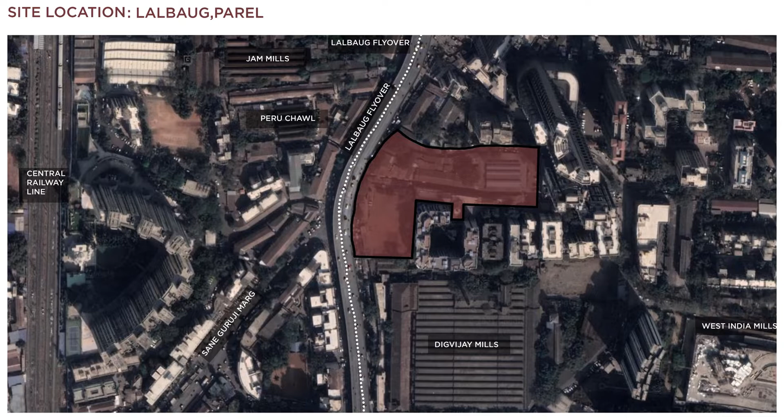Girangaon is spread over nearly 600 acres of land, with almost 60% of land having undergone redevelopment. The site selected for intervention in Girangaon is the Lalbaug precinct in Parel. It is situated along the Lalbaug flyover and beside the Digvijay Mills compound. The redeveloped buildings in the context of the selected site are visible indicators of the trauma of urban violence. They create an economic divide within the community through a stark contrast in the design of the saleable and tenement components and pay absolutely no attention to the cultural aspect of Lalbagh.

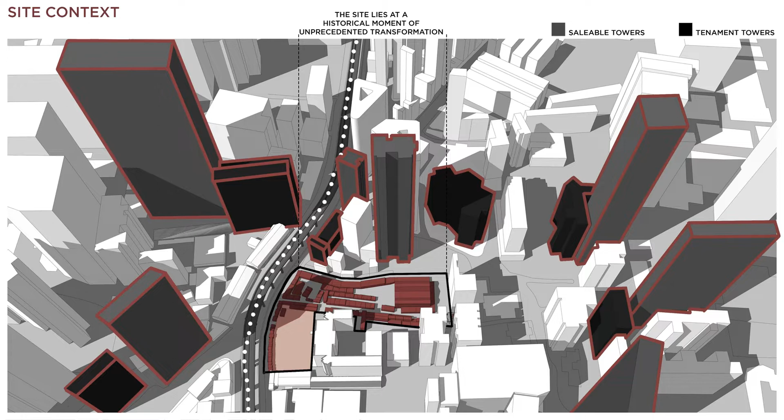Within this densely packed neighborhood, the selected site in Lalbagh is one of the very few pieces of land which lies at a moment of unprecedented historical transformation. The total site area chosen is 10,000 square meters and consists of two important components which contribute to the culture of the place: its market and its stalls. Analysis of the site has been done where all existing markets and housing on site have been marked and documented. In total, there are 239 vendors and 30 inhabited flats on site.

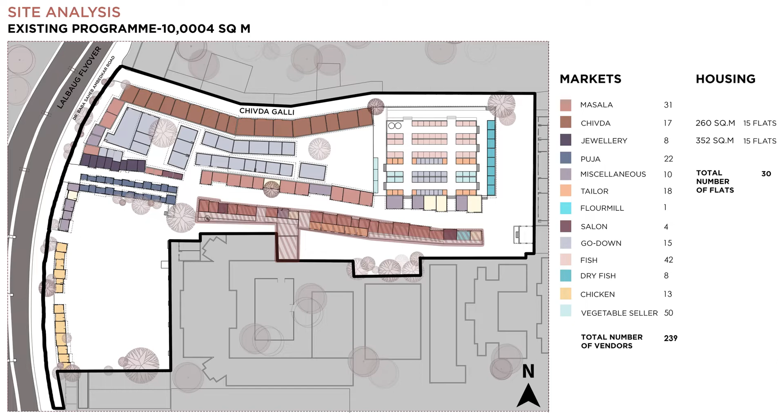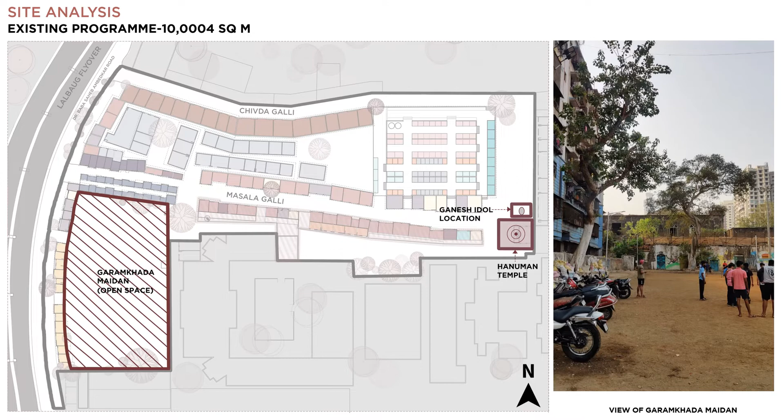What can be seen is that the site has grown organically, leading to a formation of Chivda Galli and Masala Galli. One of the most important landmarks on site is the Hanuman temple towards the east and the Ganesh idol location beside it. The only open spaces on site are the Garamkhada Maidan towards the west and the space beside the temple. During the analysis, I observed that with the setup of temporary infrastructure in different parts of the site, Lalbagh transforms itself immensely during the festival of Ganesh Chaturthi.

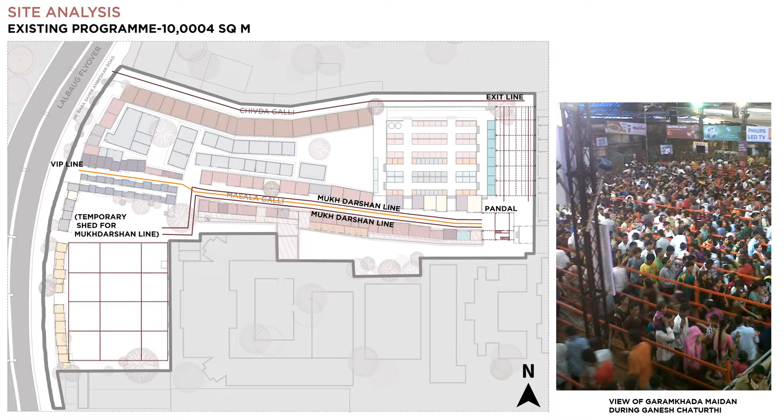In order to understand the quality of temporality as portrayed by Lalbagh, the site needed to be understood and studied in two different time periods. One, by mapping the everyday, and two, by mapping the festivities. Mapping the everyday of Lalbagh was done by analyzing the functioning of its dukans and makans. Lalbagh is very famous for its markets throughout the year.

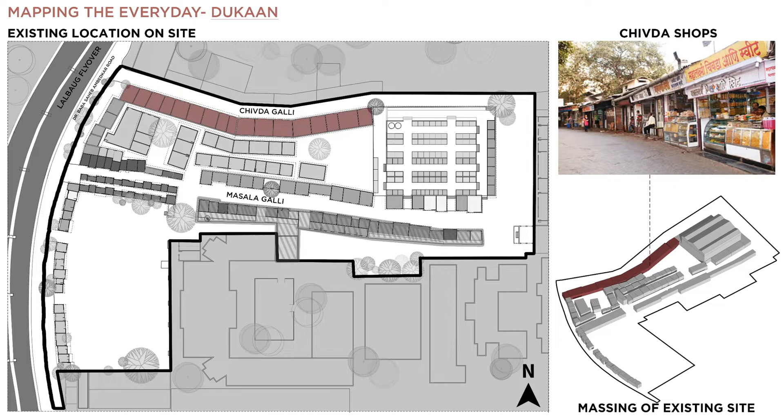A walk through the lanes of Lalbagh is filled with a variety of different smells. The shops that contribute majorly to this experience are the Chivda shops along the Chivda Galli, the Masala shops along the Masala Galli, the tightly packed puja shops situated towards the main road, and the flower vendors in front of the Hanuman temple. Apart from these major markets, what could be seen is a high number of jewelry shops on site, giving an insight into the domestic needs that this place fulfills.

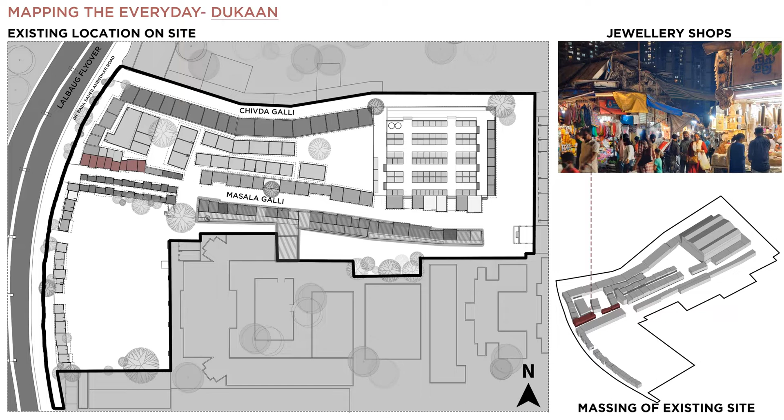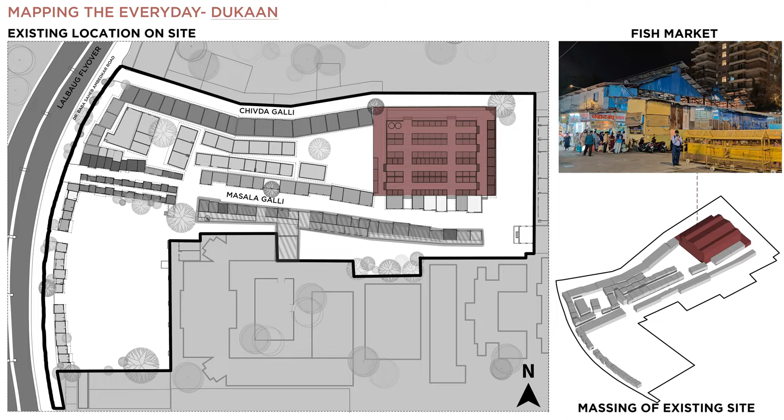The fish market on the site towards the north is of immense significance, as its construction is the sole purpose for the establishment of the famous Lalbaugcha Raja. Apart from these markets within the site, the Kombdi Galli with its chicken shop and the vegetable vendors along the fringes bring in a lot of footfall along the main roadside.

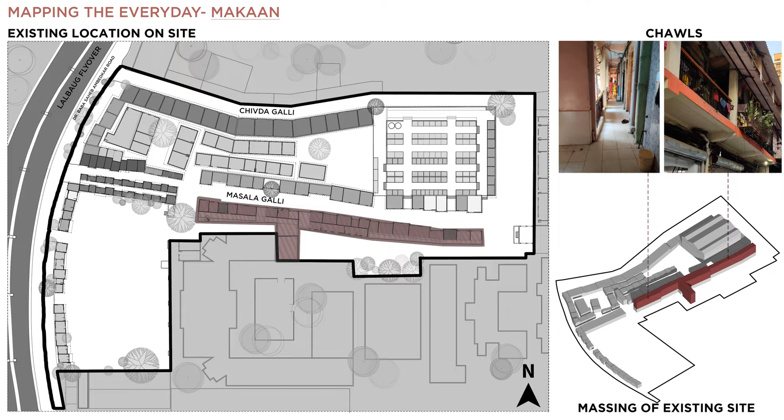After numerous site visits, what could be understood was that the true culture of these markets lies in these gullies of Lalbagh, which are incomplete without its chaos. Mapping the everyday of Lalbaug's makaans, there is only one chawl situated on site, which houses a total of 30 flats. This building runs parallel along the gullies and is a G+2 structure. The chawl culture of Lalbagh is vested within the narrow passages of this chawl, which plays a crucial role in the community interaction.

Mapping the festivities of Lalbagh: Lalbagh, the home to Mumbai's most awaited festival of Ganesh Chaturthi, undergoes immense transformation during this period. This festival of 11 days transforms the site into an urban living room. This festival can be seen to take place in three parts, namely impermanence, euphoria, and reversibility. For creating the ambience for the 11 days of the festival, all the dukaans are shut 21 days prior to its start for installation of temporary infrastructure, which brings in the quality of impermanence on the site. Even the fish market on the site changes its functions and is used as a place to store Ganesh idols.

During the festival, the site is a place of complete euphoria with absolutely no pause button to its functioning. It is only after the final Visarjan day that the shops return back to their original state and give the site a sense of reversibility, however, with the chaos still remaining intact.

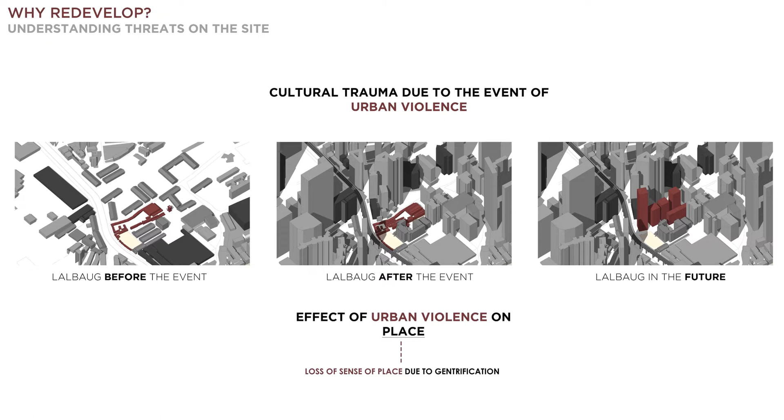This area of Lalbagh has been running in the same manner for the past 85 years, with its neighbors getting redeveloped at an immense pace, undergoing the trauma of gentrification. And owing to the age-old crumbling infrastructure of its stalls and markets, Lalbagh lies next in the line of redevelopment. If Lalbagh undergoes redevelopment like its neighbors, it would undergo a complete cultural trauma, taking away its place identity in the future and making it merge with the surrounding fabric.

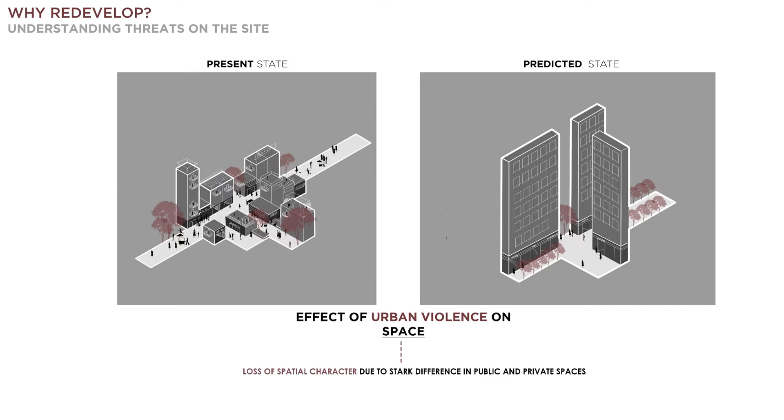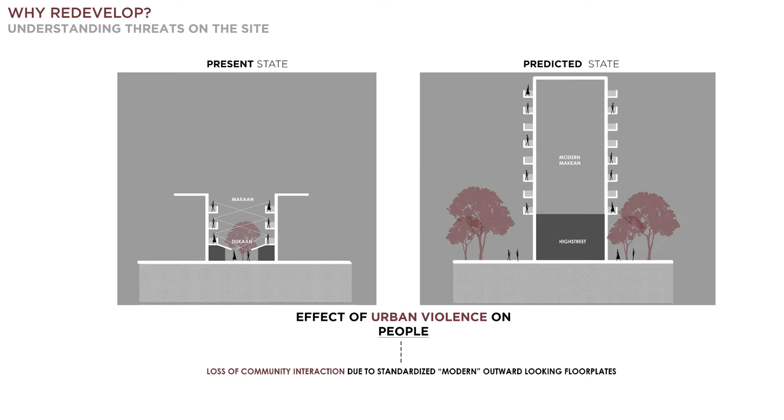This trauma of urban violence, which is a common trend of redevelopment, takes into absolutely no consideration the cultural aspects on site. It would lead to a loss of spatial character by monotonous construction and would alienate the place with the standardized and so-called modern design templates, taking away the true essence and character of Lalbagh, thus traumatizing it. So will Lalbagh become a victim of this disruptive urban transformation, or can it find a different way to survive and thrive? This makes it necessary to think of viable solutions to design problems without compromising on the necessary and relevant changes required by the place.

Hence, the design program that I suggest would entail community participation and would work on the lines of self-redevelopment. The Self-Redevelopment Act, according to MHADA, has shown immense success rates and has allowed people to choose their own architects and design strategies. The project would be funded by the Lalbaug Raja Trust and would consume a total FSI of 4. Can a culturally competent architectural solution act as an antidote to this trauma?

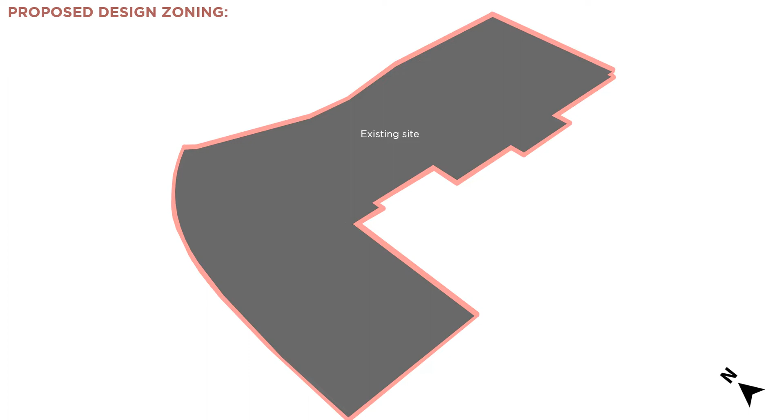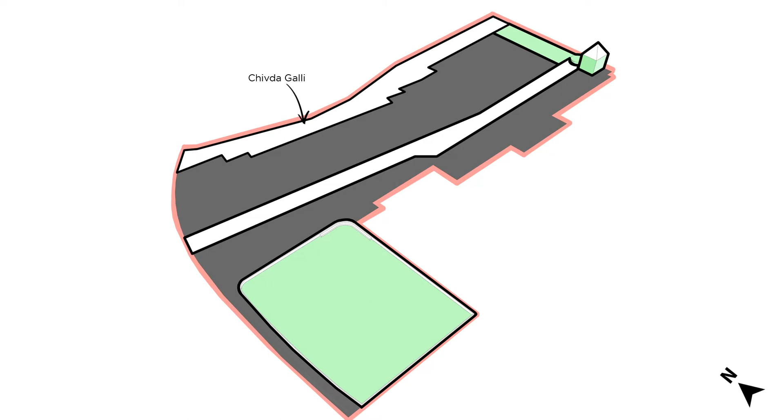The concept for my design program started with the translation of the method of self-redevelopment into my zoning. It started by locating and marking the most important nodes on site. Being aware of the significance of the two gullies, the Masala Galli and the Chivda Galli were retained. A 0.4-meter wide platform was inserted along the entire gully, taking into consideration the infrastructure that needs to be set up during the festival. In order to ease traffic congestion, a drop-off point along the main road and 2.5-meter wide pathways were added in places of maximum footfall.

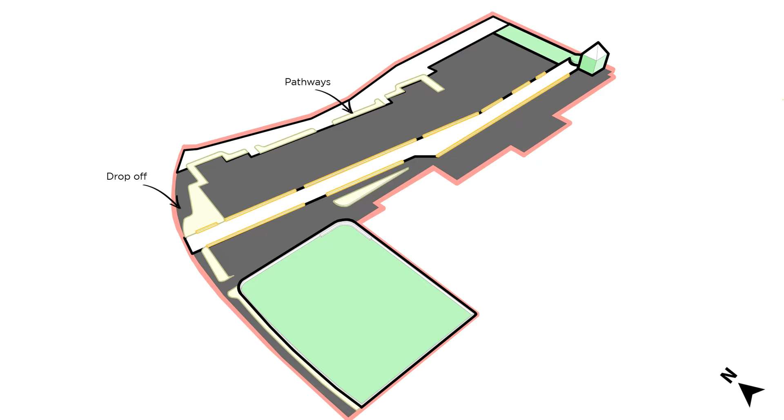Taking into consideration the close proximity of the site to 4 railway stations, and having observed that two-wheelers are the most preferred mode of transport in the area, parking areas have been provided along the road to make it easy for people to pick up goods and ride off. In order to make the main Masala Gully pedestrianized and to provide ease of servicing, a service road was introduced along the Maidan.

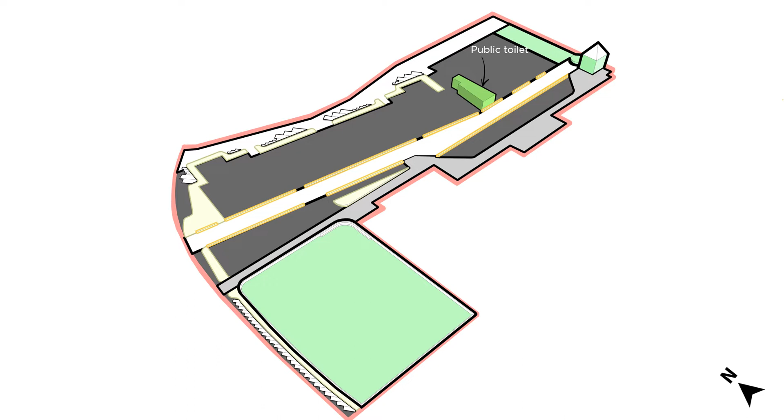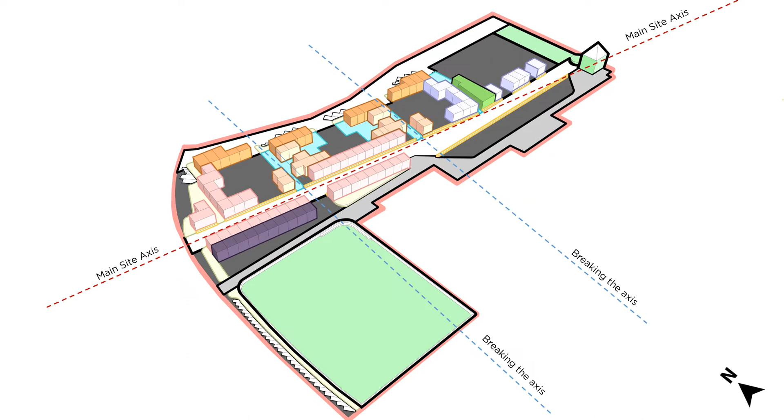Considering the lack of public infrastructure on site, a public restroom was placed in the center for easy accessibility to all. All the 30 masala shops were placed along the Masala Galli and 17 chivda shops along the Chivda Galli. The 16 tailor shops, 15 jewelry shops, and the rest of the miscellaneous shops were placed in a way that internal gullies were formed. These gullies helped break the monotony of the straight gullies while allowing the site to breathe.

Next, the puja shops were shifted towards the mandir along with the flower vending area. Understanding that buying vegetables is a domestic activity that requires minimal intervention but is done while buying other goods, raised platforms are introduced along the jewelry and puja shops, which helped serve 50 vegetable vendors. This led to the formation of one more intermediate gully between them.

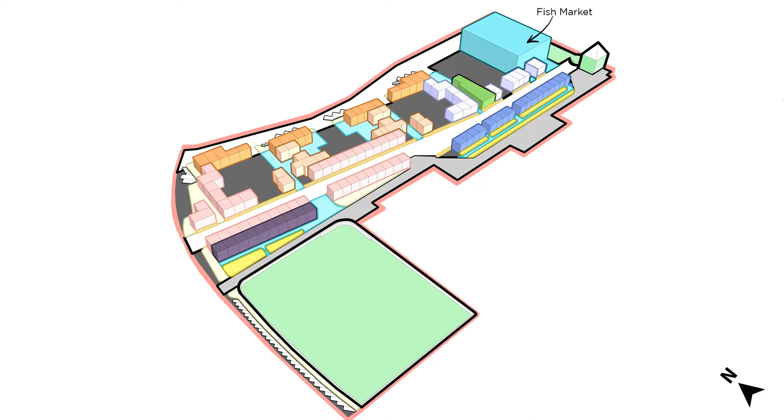The fish market, being highly significant, was kept the same, and the godowns were replaced by the chicken shops, which were earlier along the fringes of the site. This ensured a complete poultry and meat zone on one corner of the site. The godowns were shifted on top of the jewelry markets with a chili drying area, and a freight lift for carrying goods was inserted at the corner.

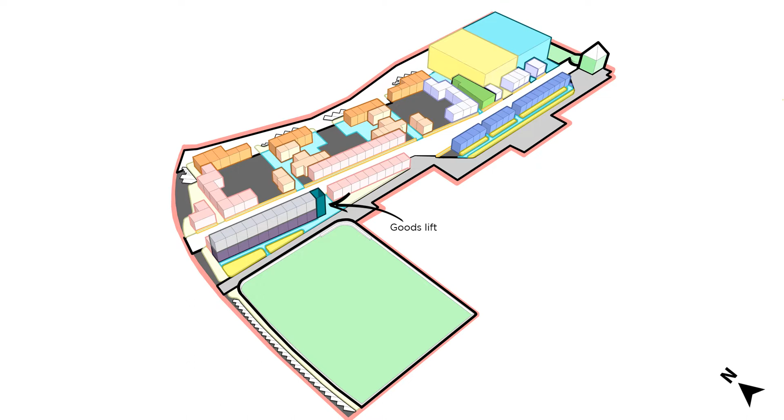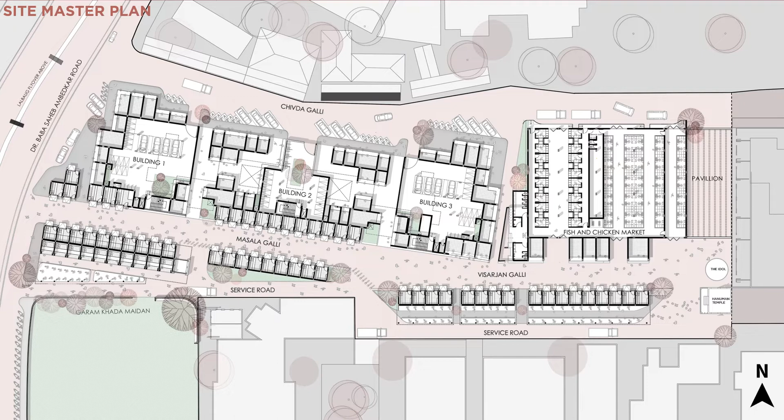The residential zone was shifted to the larger plot and was separated into 3 buildings. Taking into consideration the festivals on site, a changeable pavilion has been designed in the open space in front of the mandir. The following is the master plan of my entire site. For easier understanding of its functioning, the site can be divided into Zones 1 to 6.

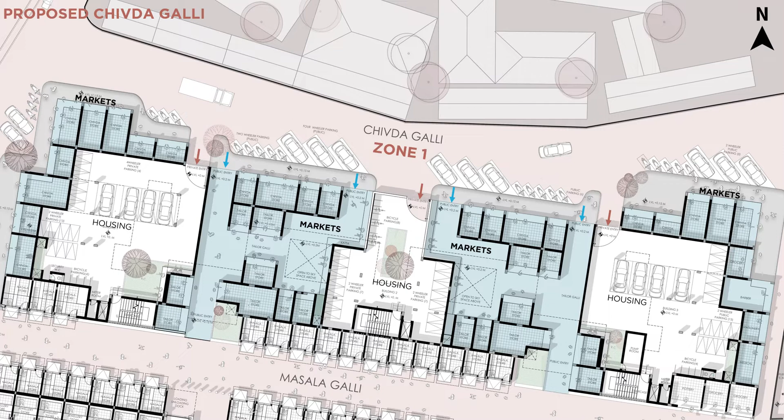Zone 1 consists of chivda shops and tailor shops. Having observed the existing chivda and tailor shops on site, the following plan was proposed. Keeping in mind the overlap of the residential and public activities along the Chivda Gully, separate public entries and private entries have been created so as to ease the circulation for its visitors and maintain the privacy of its residents.

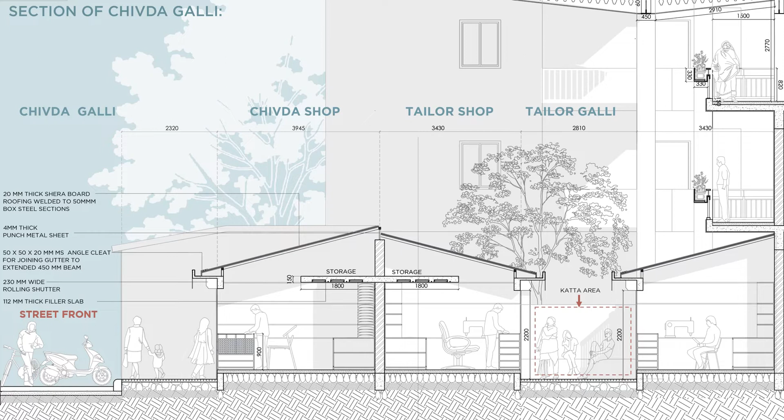The chivda shop modules have been designed taking into consideration the requirement of street front, where the street-facing facades of the shops accentuate the feeling of a gully. The katta areas act as pause points and allow the buyers on site to orient themselves while shopping. Having observed the importance of customized signages in small Indian shops, a detail has been created which allows the seller to customize his shop front while ensuring safety of his shop.

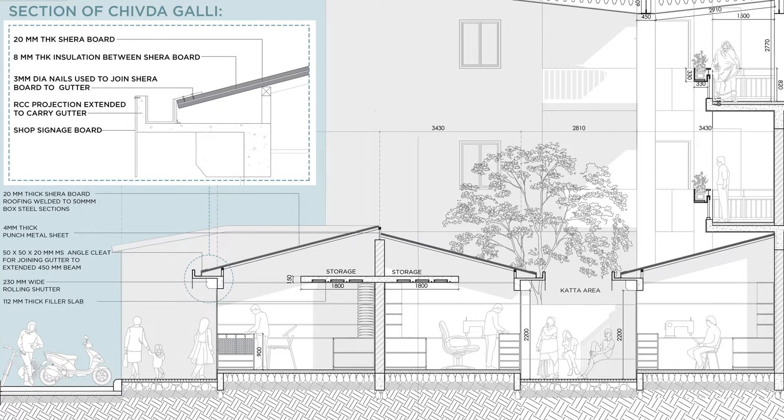The Chivda Galli has always been about its people, the bargaining and the pocket-friendly rates. However, the activity of bargaining is possible the most in places of low maintenance. Hence, simple materials like the usage of Shera board for roofing make it easy to maintain and also cost-effective for its shopkeepers. The parking along the street creates a threshold between the vehicular road and its parallel pedestrian gully.

This pedestrian gully, without any vehicular congestion, resonates with the locals and allows them to shop in the informal pattern that they always have, without compromising on the rules and orders required to make the market function efficiently. Upscaling the place in this manner will help retain the essence of Chivda Galli that it has had for the past 50 years.

Now moving forward to the second zone, which consists of the masala and jewelry shops and the vegetable vendor platforms. Similar to the chivda shops, the masala shops and their existing issues were noted and understood. In the proposed plan of the masala gully, all the masala shops have been brought together to face the gully, and the jewelry shops that were previously scattered are clubbed together.

On the other side of the gully, a platform has been introduced to accommodate 25 vegetable sellers which currently encroach the footpath. On the other side of the vegetable platform, a service bay has been introduced for loading and unloading goods which can be taken up to the godowns on the first floor by the freight lift on site.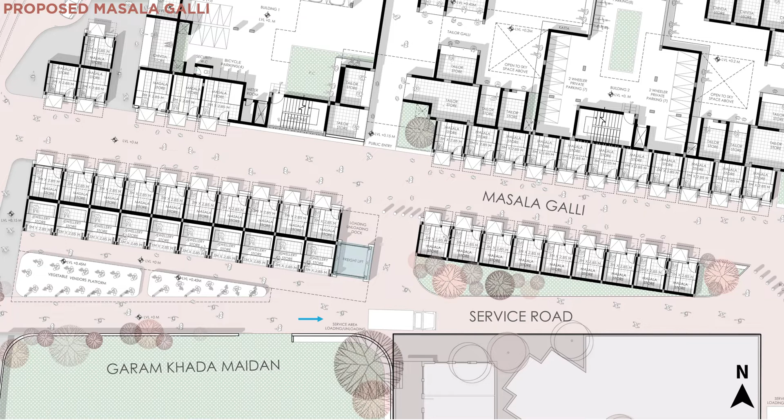The first floor of these shops along the godowns have a chili drying area. This area was shifted onto the top because a common observation on site was that most of the streets got encroached due to chilies being dried on the road itself. The space for this activity is oriented in such a way that it faces the south, thus ensuring the chilies dry more effectively.

The godowns on the other side would be used to store different types of items. However, these items may get spoiled or get discolored due to extreme hot conditions. Hence, the godowns are oriented towards the north where they could receive diffuse north light, thus preventing any hampering of the goods stored.

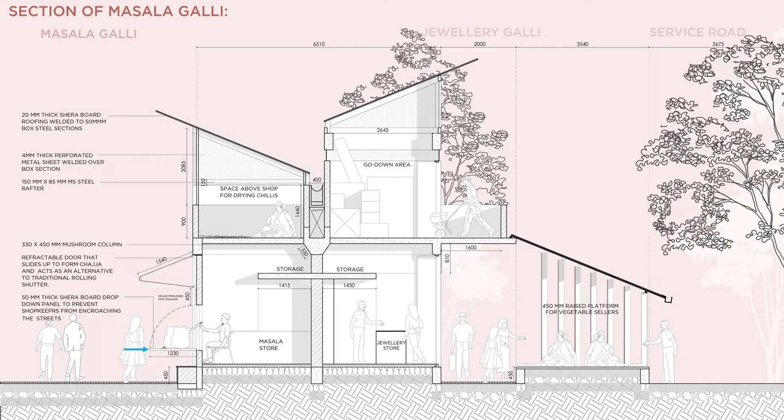Keeping in mind the encroachment done by the market sellers onto the roads, a drop-down panel detail which opens from outside has been developed, where the vendors can keep stacks of masalas which attract customers, thus contributing to the retail profits. Zone 3 consists of the puja and vegetable vendors, the flower vending zone.

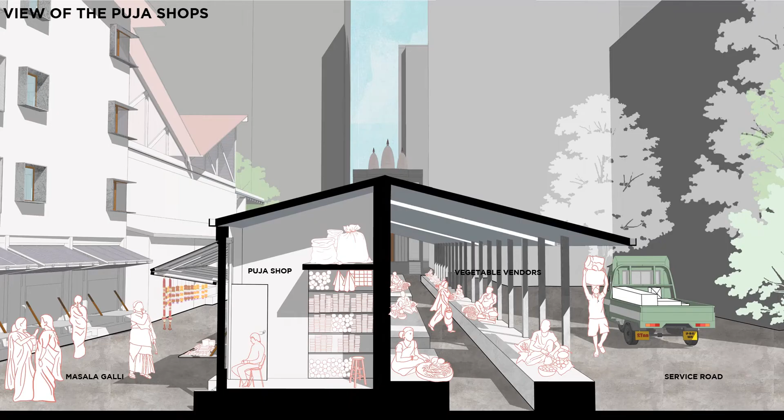Hanging goods along shop fronts, convenient for human reach, is a classic characteristic of Indian shops. This traditional method of hanging goods has been retained and made easier by the holes in the punched metal sheet of the shop roofs, thus allowing the puja galli to gain its vibrancy while avoiding any sort of encroachment on site.

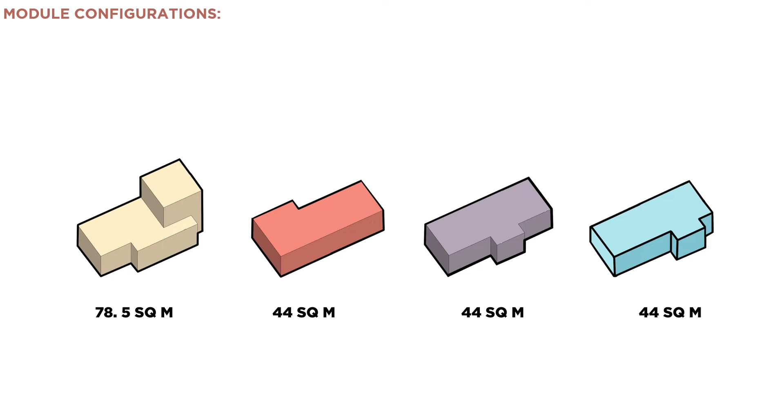Moving on to Zone 4, which is the residential zone. The once culturally strong chawls of Lalbaug have now become deteriorated and do not cater to the changing spatial needs of its inhabitants. Hence, the proposed design program, with the help of self-redevelopment, gives the inhabitants 60% additional areas, giving rise to 4 different modules.

These modules work in configuration to form 30 modules in total and are split up into 3 separate buildings placed on site in between the Chivda and the Masala Galli. All 3 entrances are located along the Chivda Galli, and a lift and staircase block in the Masala Galli is provided for each building.

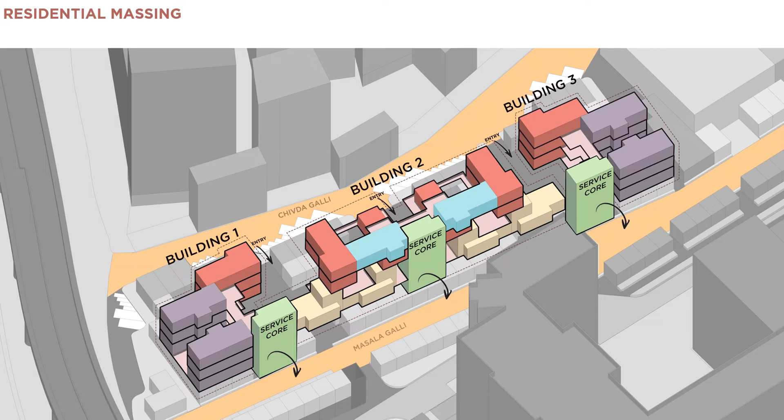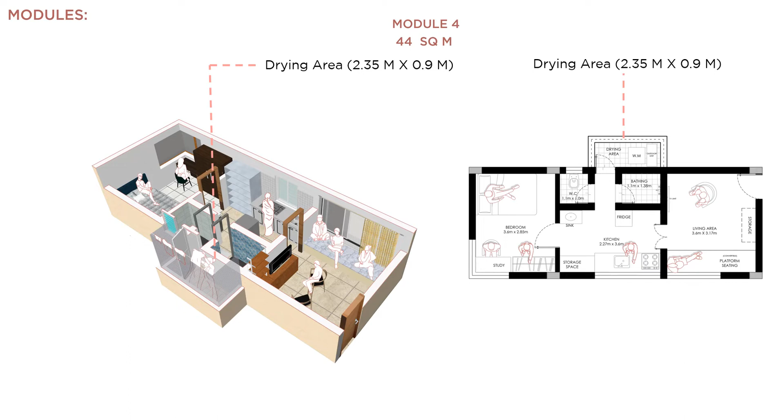Unit 1 is a duplex of 78.5 square meters with 2 bedrooms, while Units 2, 3, and 4 are configurations of one another. One common thing between these modules was the drying area that was provided in the utility space along with the outdoor units and the washing machine. In all modules, the bathroom and the toilets have been kept separate so that more domestic activities can take place within the household.

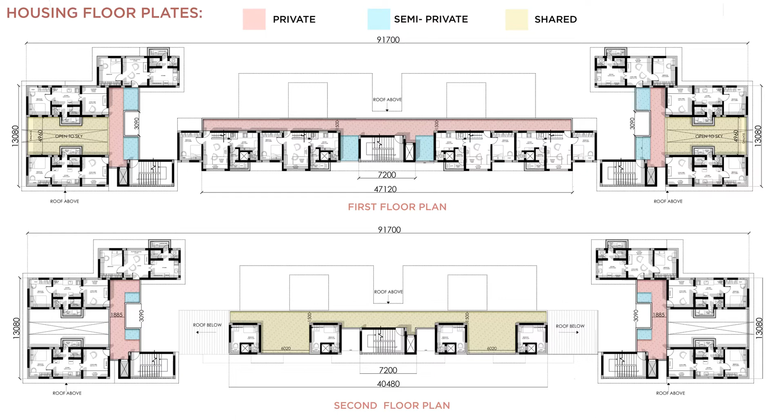These units are placed along the corridors in a manner that they share semi-private and private spaces at every level. All the three buildings have a community space which can be used for different congregational activities. Sloping roofs have been provided on top to prevent any possible means of encroachment.

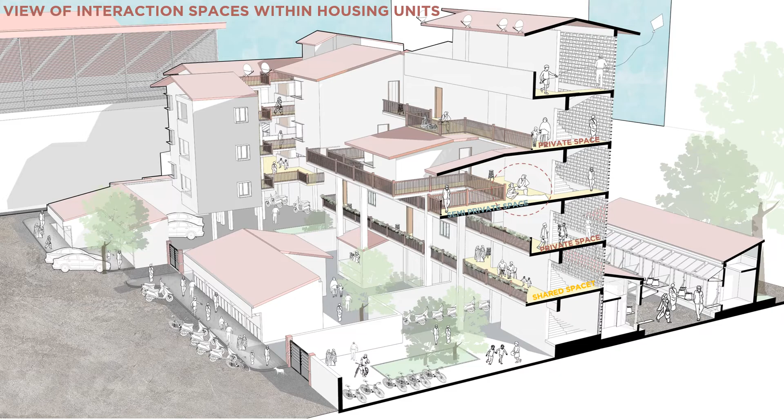A very dense urban context usually creates a sense of intimidation for the dwellers living in low-rise zones. Hence, all the corridors of the three buildings face each other, ensuring maximum interaction between its residents. The semi-private spaces serve as congregation areas for the practice of local activities like pickle making and papad drying.

The staircase on site is oriented towards the Masala Galli so that it adds to the experience of the transition zone and also acts as a platform for its residents to view the festivals during Ganesh Chaturthi. The residential zone has been oriented in a manner so that there is a visual connect between the Makaan and the Dukaan on site.

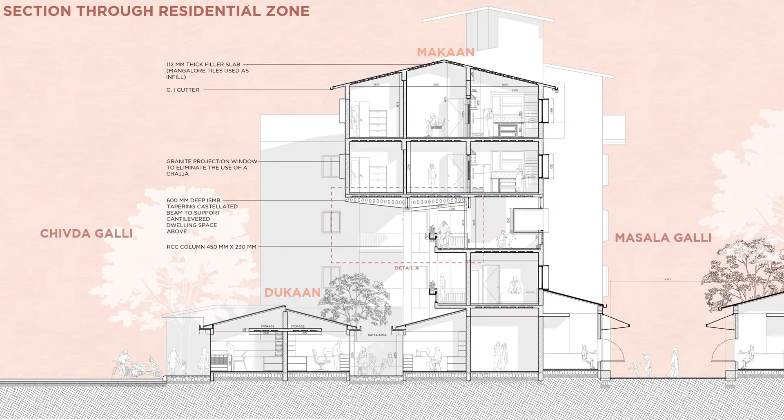Small interventions have been provided at different levels of the house. One of them being the usage of a small metal projection along the railing to keep the Tulsi Vrindavan. This helps maintain the cultural authenticity of the site. The metal grill of the projection has a small gutter-like drain which carries and disposes of the excess water rather than letting it spill over onto the building surface, a common issue seen in most residential buildings.

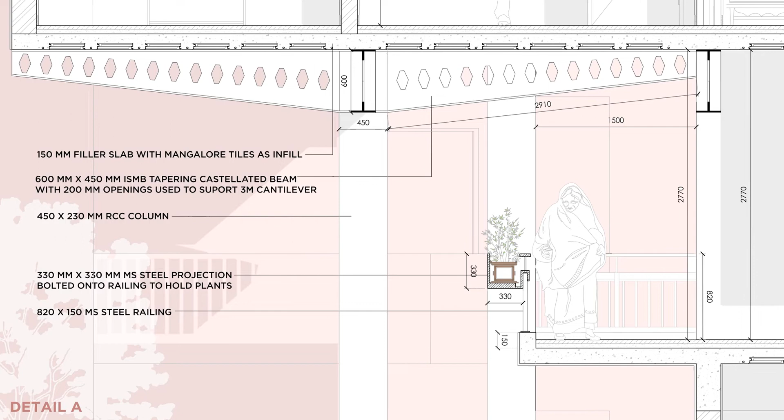150 mm filler slabs with Mangalore tile infill have been used to cut down on the cost of construction. Instead of simple RCC beams, tapering castellated beams have been used to provide support to the cantilevered portion of the housing. They provide both functional and aesthetic value to the housing project. The sloping filler slab on top adds to the charm of Parel without compromising on the feeling of a pakka house as desired by its dwellers.

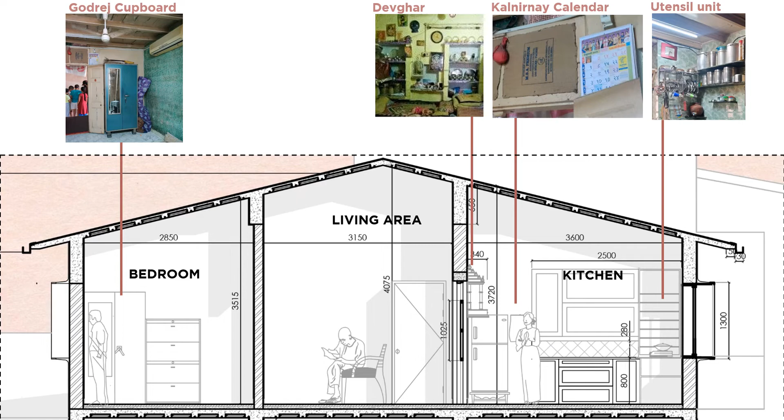Having noted the furniture that is commonly found in these households, the spaces have been created to accommodate the same, giving its inhabitants a sense of comfort. Small windows and poor light and ventilation have been a common issue for most tall housing projects. Keeping this in mind, wider windows of 1.3 by 1.7 have been provided.

To eliminate the usage of chhajjas, a detail has been developed where the granite fitting around the windows is extended ahead by 0.5 meters, thus providing protection from rains and also adding to the aesthetic value of the building.

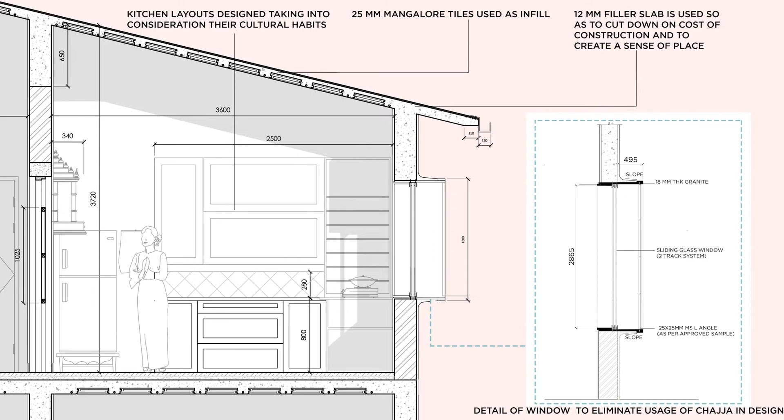Zone 5 consists of the chicken and the fish markets. Even though the current existing fish market faces tremendous footfall throughout the day, poor garbage disposal and ill-maintained services make it difficult to maneuver around the site.

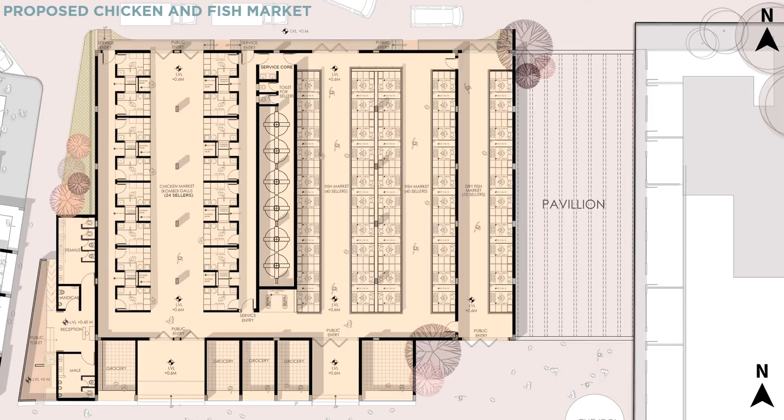The introduction of chicken shops in the fish market makes it necessary to ensure proper servicing for both activities. For this purpose, a service core has been introduced in the center for both the markets. Both the markets are connected to a service bay on the backside where the service vehicles can be parked. A knife cutter katta is provided in the center where it's a shared activity between the chicken and the fish vendors.

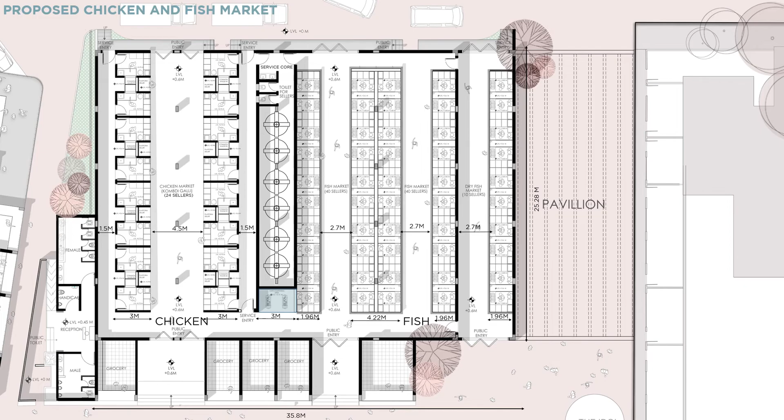In the following section of Zone 5, all the proposed chicken shop modules have a service lane behind them. The size of these lanes has been decided based on the different anthropometric needs of the chicken shop activities. This lane also ensures that there is no spillover of the chicken waste in areas of seller and buyer interaction.

There are a total of 8 chicken modules on site, where one module consists of 3 vendors each. A waste pit is created at the center of the 3 vendors, where the waste created during the butchering process can directly fall into the waste bins within the waste pits. This can be collected out via the service lane for garbage disposal to be converted into biogas.

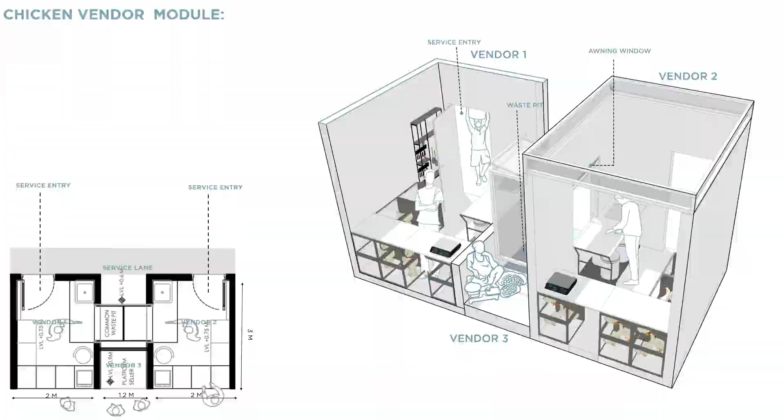Next to the chicken market is the fish market. Here, platforms for a total of 40 sellers have been provided. Similar to the chicken shops, a waste pit has been provided in the center of the two platforms. To ensure adequate and hassle-free water supply for cleaning, small taps have been provided for every vendor. This would help in making their work more efficient while ensuring cleanliness on site.

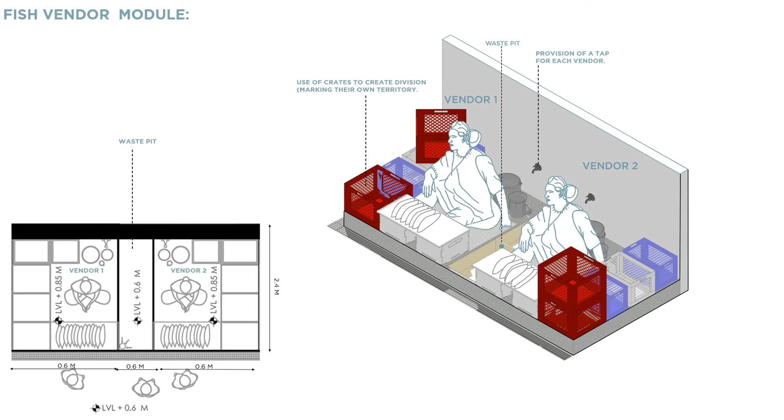The idea was to work a way around the existing pattern and habits of the users without compromising on the necessary hygiene required in a public space. The next zone consists of the Pavilion of Impermanence, which is situated just beside the fish market on site.

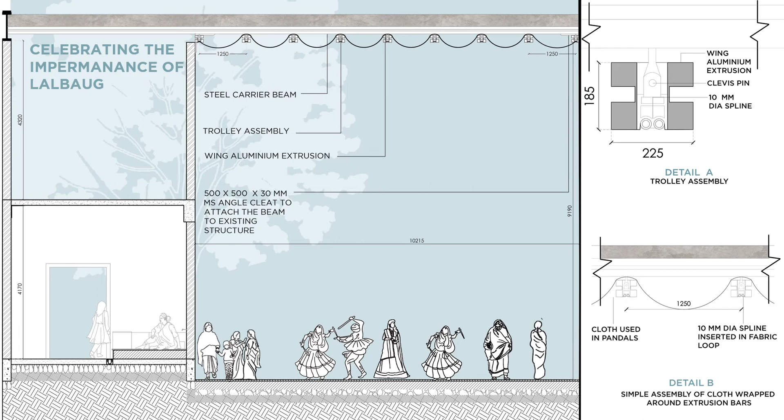The pavilion is inspired by the quality of impermanence as portrayed by the site, hence it is retractable in nature and consists of carrier beams which have been mounted onto the dry fish market and the existing building podium. The aluminium extrusions contain within them a trolley assembly which helps in attaching different materials to the framework of the pavilion. In this way, the pavilion can change the spatial quality of the space through the usage of simple materials such as PVC fabric or even locally available colorful corrugated sheets.

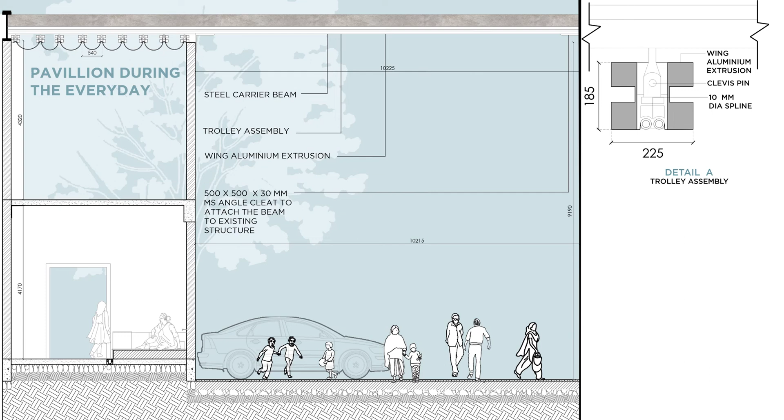The flexible design of the pavilion allows the space to change as per different festivals, be it Dahi Handi, marriages, or Ganesh Chaturthi, thus allowing the radiance of the festival to be reflected in the space. On normal days, the roof can be shifted inside on top of the dry fish market. This would ensure an open to sky space once again post the festivities. This nature of assembly and disassembly portrayed by the pavilion helps add to the true culture of impermanence on site.

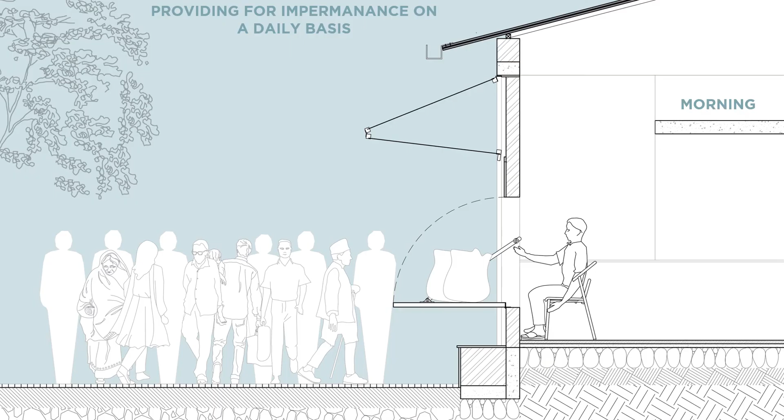What can be seen on site is that the quality of temporality not only exists on a yearly basis but also on a daily basis, where the gullies change their use, from a hustling market in the morning to a cricket gully at night. These features of the site were incorporated while designing in order to make the proposal more culturally competent.

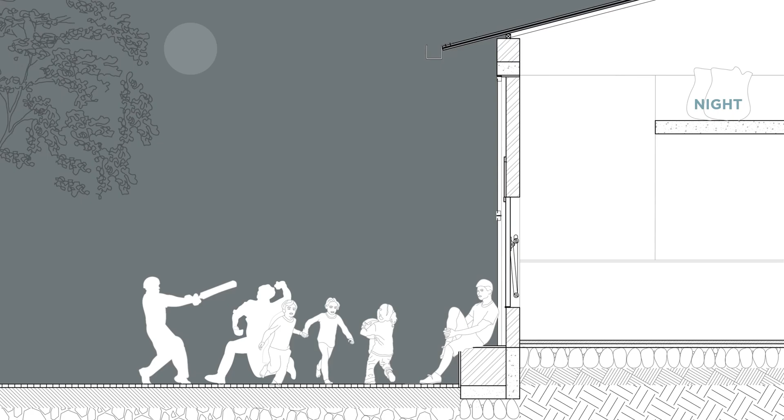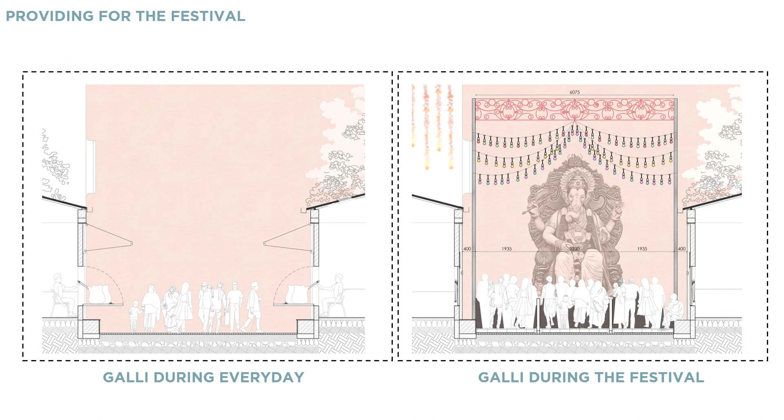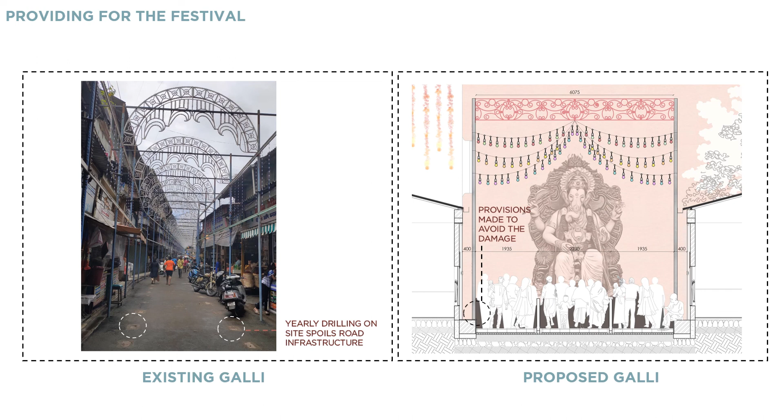Keeping in mind the festivities mapped on site, provisions have been made to transform the site, thus portraying the quality of impermanence, reversibility, and euphoria. The drop-down platforms on the roof are shut to form an obstruction-free gully used for Mukhadarshan and Visarjan on site. The 0.4 high platforms provided along the Masala Gully have grooves which can accommodate temporary infrastructure which is put up during the festival, thus preventing the yearly drilling of the roads on site.

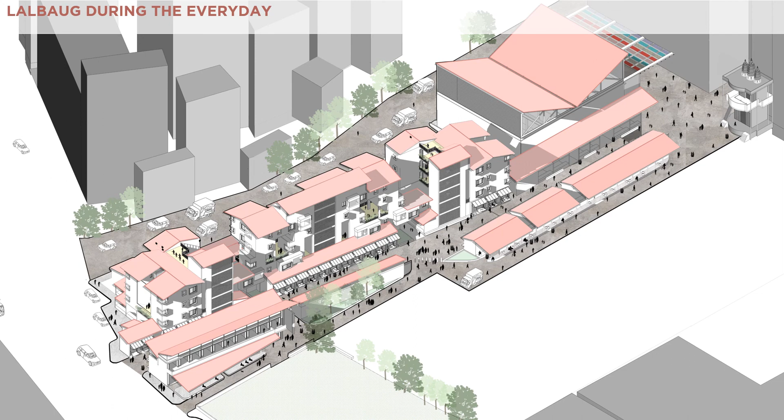What is understood of the place is that the true culture of Lalbaug lies in its nitty-gritties, its chaos, its impermanence, and constant interaction. As quoted by a famous architect, the problem with urban redevelopment in Mumbai is that we give permanent solutions to temporary problems. Keeping this thought in mind, my design proposal aims at designing for the informality by giving simple solutions to the issues faced on site with a sensitive approach, thus proving the power of architecture to heal cultural trauma.